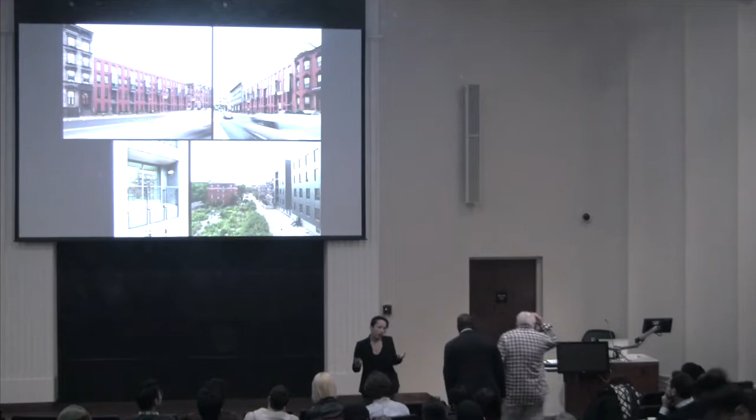As Milton said, I titled the lecture Negotiating Identity, and I'm hoping that I can present a very humble and honest path in understanding the work after 16 years in practice.

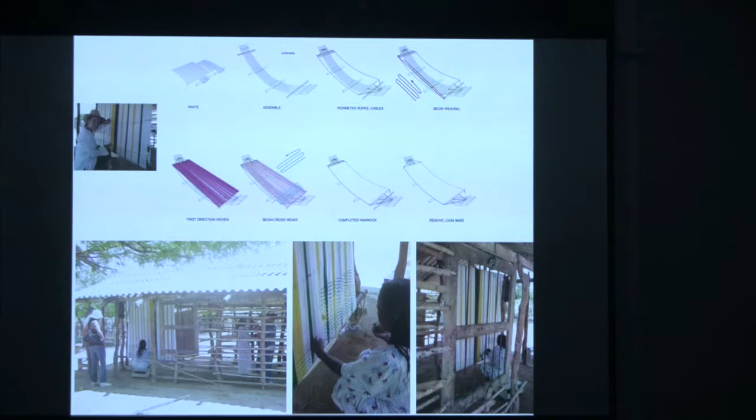I was really struck by how the indigenous Wayuu would actually have their housing structures, their posts and beams, as part of the structural framework for the loom of the fabric. This provided me a structural idea and system to create the loom out of this 40-foot long structure, made of pretty much 2,600 linear feet of rope, which is almost 5.5 times the length of the Boston Hancock Building.

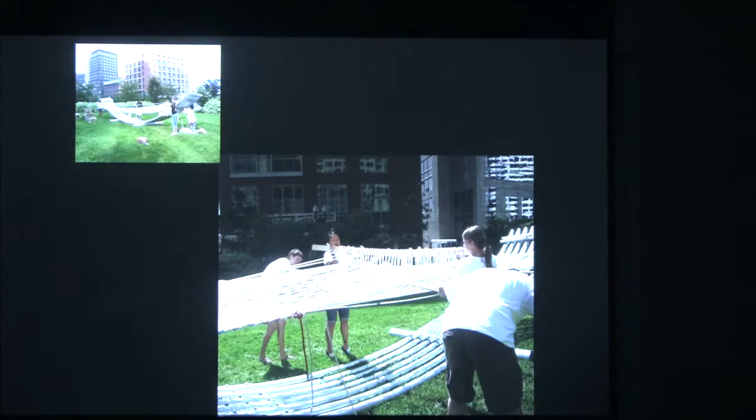The idea of creating the structural loom, and then creating the warp, the main structural rope. We needed to create a very long needle to weave the fabric together. The idea was to put this in the Greenway, where a lot of neighborhoods abutted the area, including Chinatown, the financial district, and the Seaport district, all along this mile-long Greenway. What we created were performances, and it took four days to actually weave this whole structure.

It was a performance piece. We wanted to make sure that people in the financial district would look at the labor involved in the product, and we would provide brochures to let people know where hammocks came from. So there was a conscious decision to know where things came from.

We had the Big Hammock Song performance on the space, and we also produced a book in three different languages because we were right next to Chinatown. We produced English, Spanish, and Mandarin editions to have readings for children coming to this public space. Again, we wanted to find a way in which people who didn't necessarily know each other could just start talking to one another to spark conversations.

In terms of culture and identity, that was something particular that I would say my identity mattered, and I wanted to share that. When you're working in your own practice, you have other cultures and other interests.

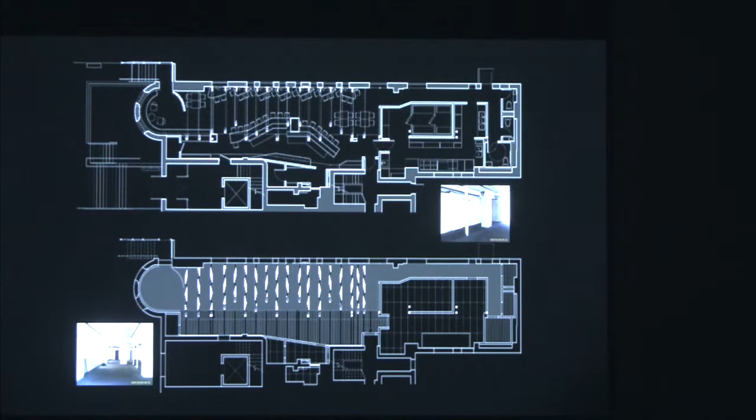So what we did is we incorporated LED lighting through a slot, so as you were going through the space, you felt a sense of movement through those projected lines.

In terms of gathering, I was very fascinated by visiting Brazil and how people eat there. Usually with furniture, one sits right next to each other instead of in front of each other. So we found a way in which these structural ribs would support the tabletops to allow one to be closer to one another.

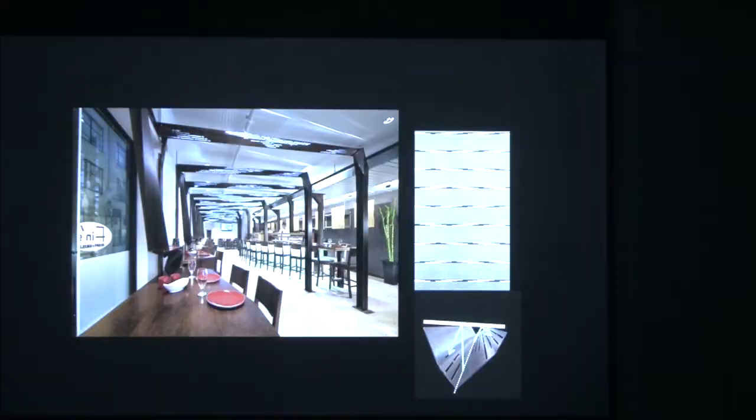In terms of the joint, as Milton mentioned in the introduction, we did grow up in the digital world. We knew we were very facile with CAD/CAM technologies. It was a really good way for us to work directly with materials when you're first growing your practice.

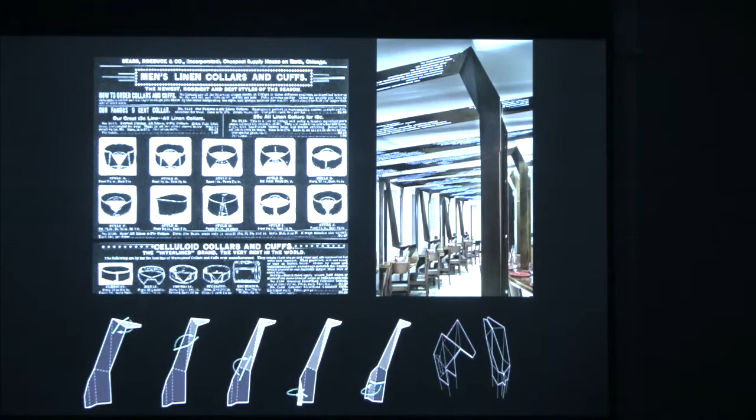We designed these joints taking influence from origami, and we developed what I would say are flexible joints. The idea of flexible joints for us is we wanted to create a frame that was both post and beam. We called this an architecture of joints, and we were really fascinated by men's collars and these joints. Can you find a way to remove the categorization of structural systems by creating flexible joints? That's how we created continuous rigid frames.

The idea here is that the frames, which incorporate the lighting, also extended like a waiter. When a waiter comes and provides you with a menu or a wine bottle, it also provided a shelf for the soy sauce, the containers, and the menus for the space.

In terms of another motivator for the practice, similar to you, as an undergraduate student when I was at Cornell, I found the motivation—like how does one begin to produce work that has conversations about the things you felt were unjust in your educational system.

Motivation for me, in terms of being determined to have live conversations about something I found annoying, was basically an insult: during school I had professors constantly showing me Carlo Mollino's work, the futuristic architect who practiced in the mid-20th century. The objectification of women I found highly disturbing, and how the body was contextualized in the actual plan—that you literally take a torso.

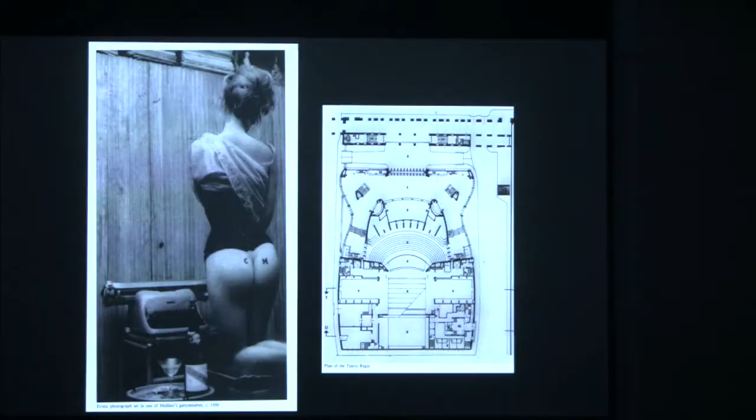I felt that the woman's body was a colonized figure—literally you would take the shape of the woman and put it on the table. And I felt like for you to take the profile and put it on a table for you to eat from, I felt was perverse in some ways, that you can touch her, you can control her body.

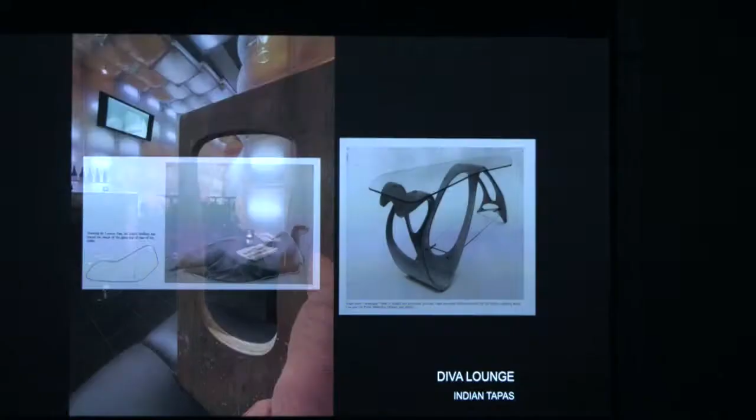And so when we were asked to do an Indian restaurant, Diva Lounge in Somerville—all of the projects are basically in the Boston and Cambridge area.

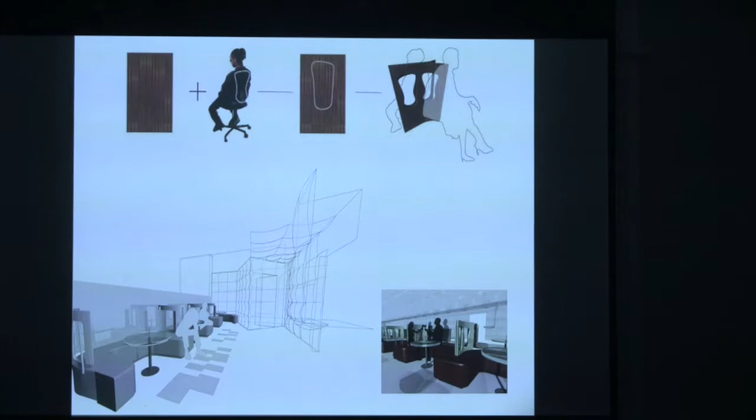I thought this was a great opportunity to look at the silhouette, the contour figure of both male and female. So we began to take the profiles and remove the material, similar to how the artist Gordon Matta-Clark would use the cut to remove the distance between object and subject, or the house interior. By showing the interior, you're exposing and removing any kind of imagination—it is what it is. That's what we're also doing by removing the surface where two strangers might be next to each other, providing a surface of flirtatious connection or touch. We were trying to let that be a moment, an encounter of togetherness versus the separation of different bodies.

The Diva Lounge pods were completely enclosed with prefab replacement domes, the kind you see in skylights. At the time we did Diva Lounge in Somerville, it was a very avant-garde project.

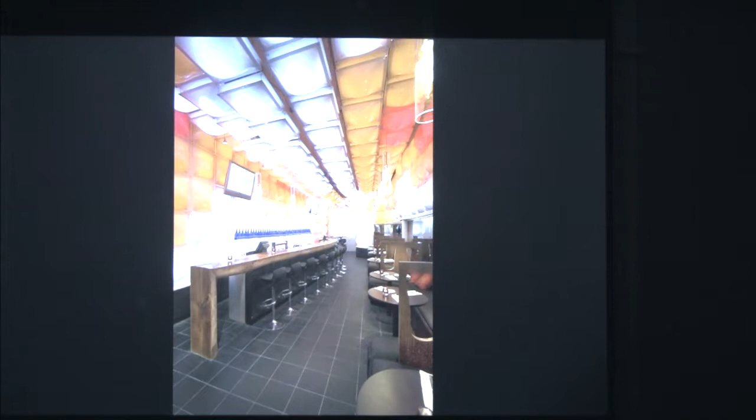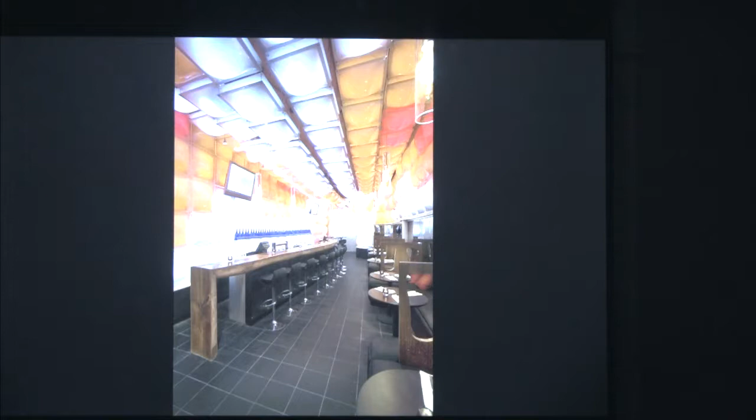In interiors for restaurants, you can only have about 10% be of a different surface or fabric material—you couldn't clad the whole interior without sprinkler systems for different materials. So what we did is say, well, it's a lighting atmosphere, not really a decorative surface. It's called decorative surface, and you can't have more than 10% be decorative surface. So the way we got through fire codes was to basically say this is lighting cladding—a lighting interior is not a surface at all, it's lighting. We were able to convince the fire department this was okay within their codes.

The door had two eyes, and it was a way of showing the reflection—you don't really see what you see. You think you might know something, but you don't. So this idea of the inversion of the two mirrors as you approach is a way to make people stop and think before entering into a project, into a space.

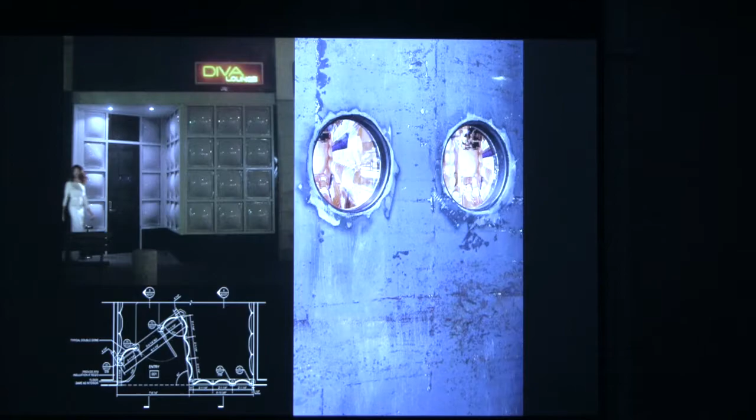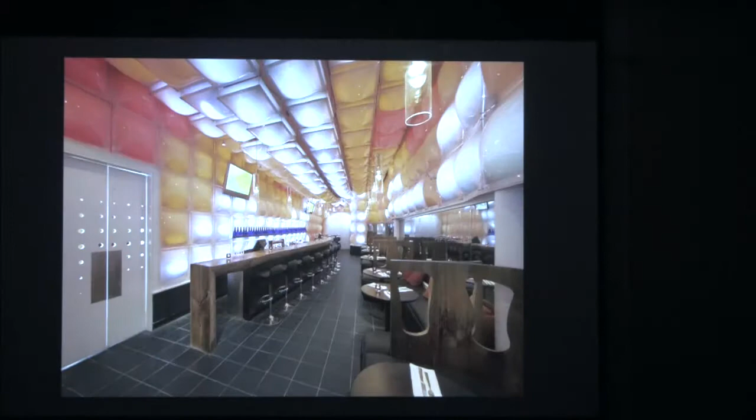We created a lighting scheme based on where we thought social condensers might actually occur along the bar, and that became the lighting plan.

I was always very influenced by Eva Hesse, and I really loved these art pieces she would do. I found that women and men share the same thing—I was looking at nipples and how they're shared by both genders. So I wanted to create a nipple table, because I wanted people to fawn over the table while they waited for their food. Here's another idea: whenever we have a chance to make people stop and think about our differences or similarities and have fun while doing it, we do that with our projects.

One request from our clients was for a bar—so what happens at a bar really late at night? People have accidents, they vomit. They asked us to think of a texture where you don't see the vomit late at night when everyone is drunk, and literally we had to respond to that. What we did is use a rubber slip mat foam as formwork to play with plaster.

So this is the long beer hall.

We needed to create an identity from the entrance for this industrial building owned by the city. There was a retail component where you would sell Harpoon's clothing products, and then you would enter the beer hall before going into the tasting room.

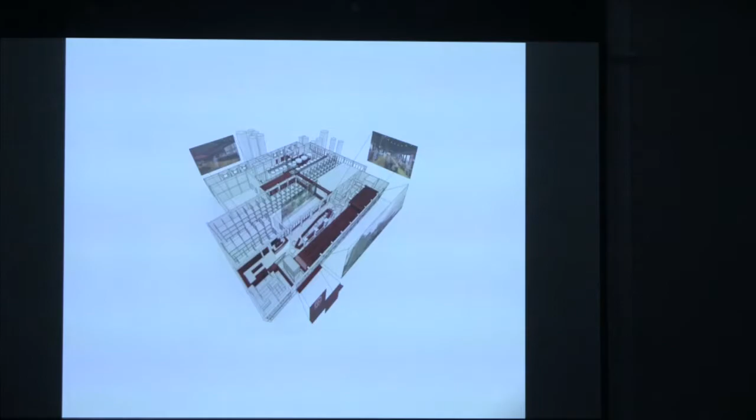There needed to be a connection to see the microbrewing process from the beer hall. You can see that was part of the industrial building, which is right near the seaport.

I always look online to see if our project is successful, and this made me really happy: props to the brewery for the view of Boston from the urinals at the beer hall. You probably think I'm obsessed with the bathroom—I am. So here's the bathroom with the urinals overlooking the sky, and you're going to see the view in a second.

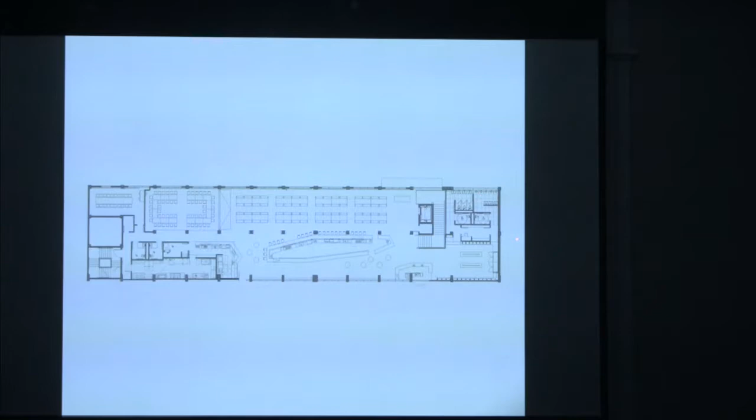I was here with the owners, all men, and typically presentations are made to men as a majority. They were so excited to have that skyline view. And I made sure the women could also have that view—this is why representation matters and why women need to be at the table. I did it through their sinks, because you still need privacy. So here's the view they were really striving for.

So representation matters, and I'm obsessed with gender only because of my experience developing a practice from nothing to something. What are the struggles along the way?

Out of 41 or 42 Pritzker Prize winners, they're still almost all men. We only have one Zaha Hadid, and two who won with partners. I was very happy to see Balkrishna Doshi win, because he actually wrote in my book and was wonderful to work with—he wrote about the Indian project he did.

In terms of the Pritzker Prize, as Milton said, when I find something that doesn't seem right, I try to use academia to investigate why systems haven't changed. Mainstream architecture history and criticism does not incorporate discussions of class, race, religion, gender, or sexuality in reference to the producers of architecture. Ignoring these differences enables presentations of a homogeneous history.

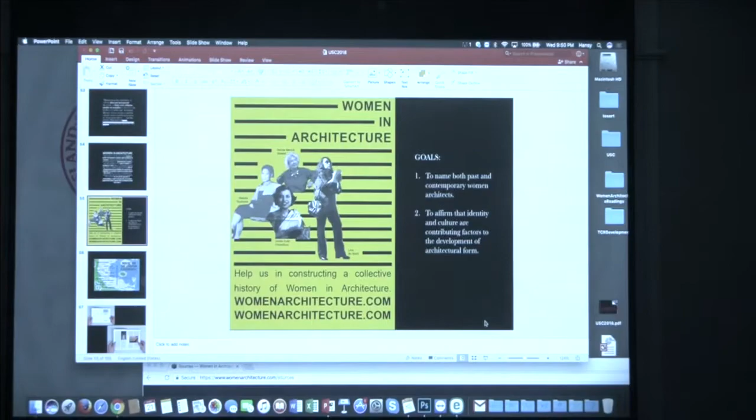As Milton mentioned, we're the utopian visionaries, architecture of social exchange. When I put together the edited book with different contributors, my interest was to say we understand we're a global practice, but it's not necessarily a single narrative anymore—it's a collective narrative of different places. So how can a book be put together to portray the various narratives one has in experiencing projects, social projects?

In the book, I interviewed Simon Velez, a Colombian architect who works with bamboo, and I learned 3 things from him—advice that I would give to you, that I've taken to heart. One is: give your work for free to the city. It allows for experimentation.

The second was: do not work with prefabricated materials. It robs people of work, and it doesn't really embrace the idea of craft or advanced craft in general. And then the third thing was import-export laborers.

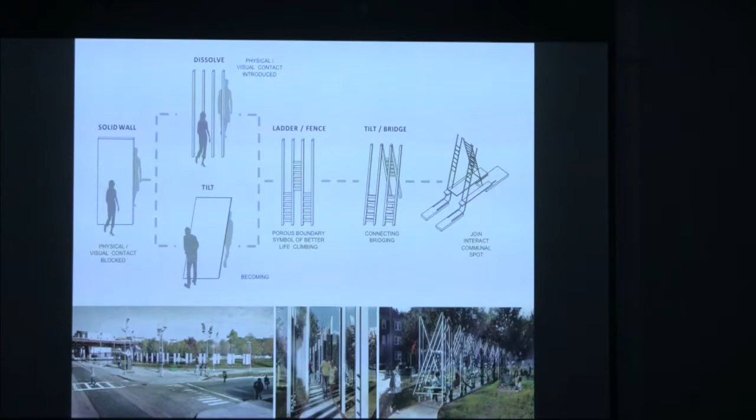And so the idea was to create really a social space. And so we use Rexlace, which is what you make friendship bracelets out of, and we use our garage a lot to fabricate these installations. This one was a little bit more complicated in terms of programming.

So what we found interesting is to bring people there, we offered free ice cream. You get a lot of people coming to the public area. But it was a hook to start talking about the great contributions immigrants provide to the city of Boston.

And we had literally Boston Public Library come and do readings. We had live puppeteers. We worked with the Mayor's Office of Immigrant Advancement, and we had sessions to show them legal services that were available to them.

And then we also made another book, but this time we were dealing with the Vietnamese immigrant population. And we did a book called The Ladder Falls and Forms a Bridge, in Vietnamese and in Spanish. And it talks about...

A poem: I can't speak English. True, your parents' accent - proud you should be, and keep your head up. I don't like my fingers, Mom. Dear, you have stout hands that help with the chores and learn new knowledge - proud you should be, keep your head up. I don't like my eyes, Mom. Dear, you have a vision broad and far that has seen this land and your ancestors' homeland - proud you should be. And then at the end it says: I like myself, Mom. I like my accent, I like my fingers, I like my eyes, I like my figure, and above all, I like you very, very much. Proud I would be, keep my head up.

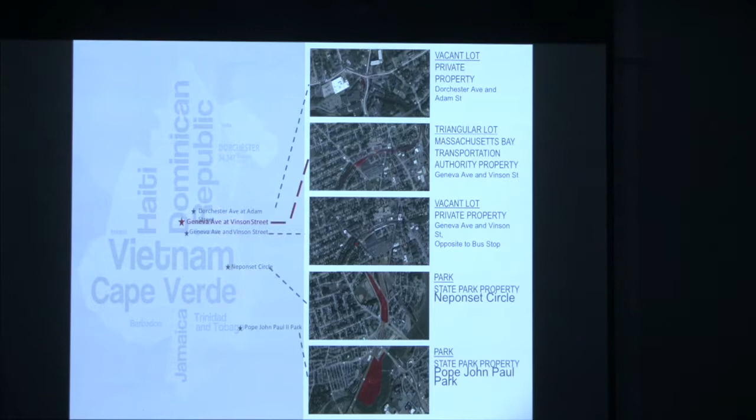What we learned from this project, because I take on all the liability myself, I take all the permits myself, is that Dorchester doesn't have—first of all, where you need public art most is not in the places where you see them. It's usually where all the visitors and tourists go.

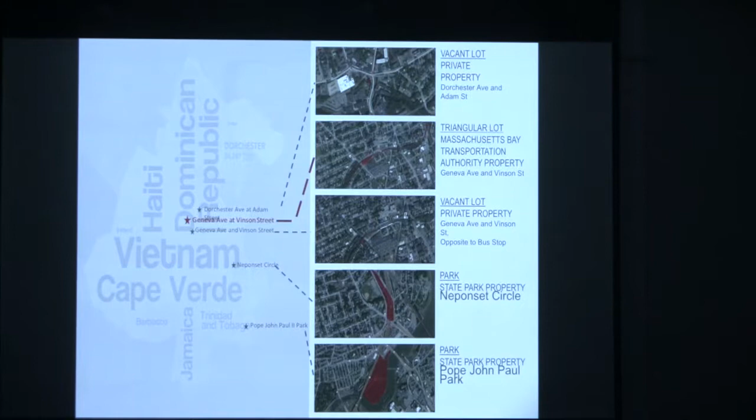What we realized in Dorchester is that a lot of these vacant lands are owned by the state—the land we picked was owned by the Massachusetts Bay Transportation Authority. A lot of public land is owned by the state because it's adjacent to train stations, and there's no communication between the state and the local city. So a lot of these lands just aren't cared for. That's what I found interesting in these areas.

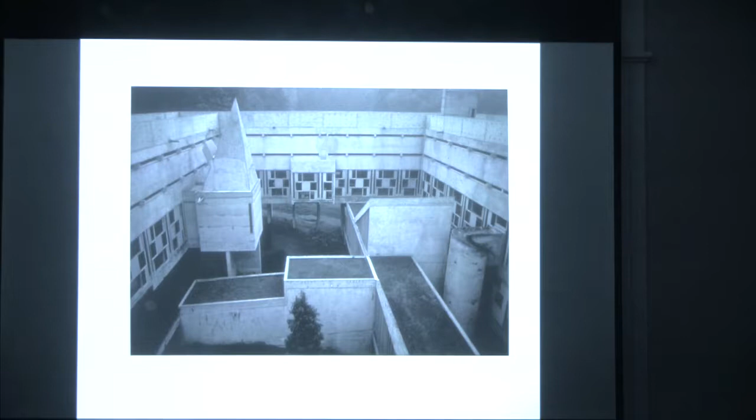The Modulor man, right? The blue Modulor figure—how tall? Really tall, like six foot, like the blue versions with your hand up. So if you're drawing architecture using the Modulor man, a very tall human figure, you see these strips here? I had to jump up and down just to experience what my colleagues were experiencing. This is the moment I felt exclusion in architecture.

It exists, and how do you set up that process so you could be inclusive? So this next project—we were asked to do the Multicultural Center, a space for students of Asian descent, students of Latin descent, and LGBTQ students of color.

What was fascinating about it is that this space came from a series of protests. When I was going to school in the 90s at Cornell, there were protests from students. So change actually occurs from student protests.

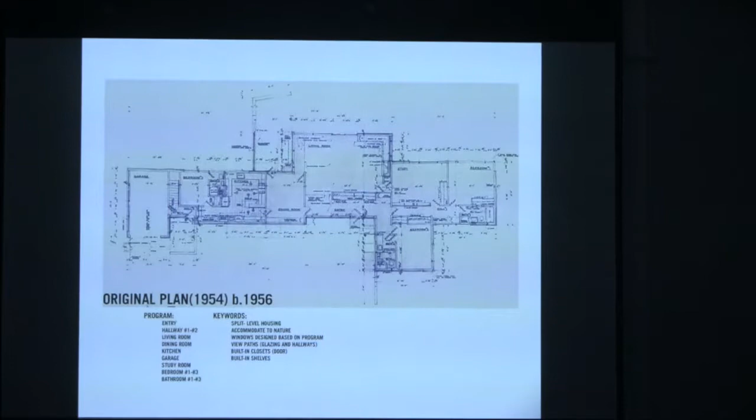The original plan was from 1954. It was used as a residence for a dean of students, designed by Walter Pierce. You can begin to see that they were considering it a historic structure. What I found interesting is that Walter had a collaborator, his partner Marion Fisker, who was also a designer and artist.

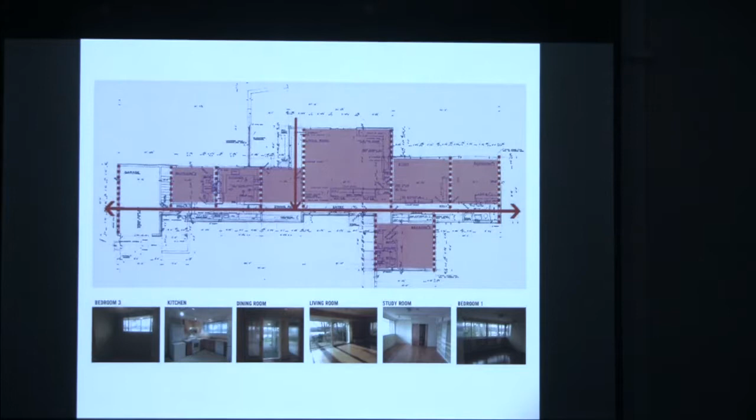It was another kind of conversation I felt I was having in contemporary terms: how do I bring back the idea of printmaking, since she was also a printmaker, into this kind of design process?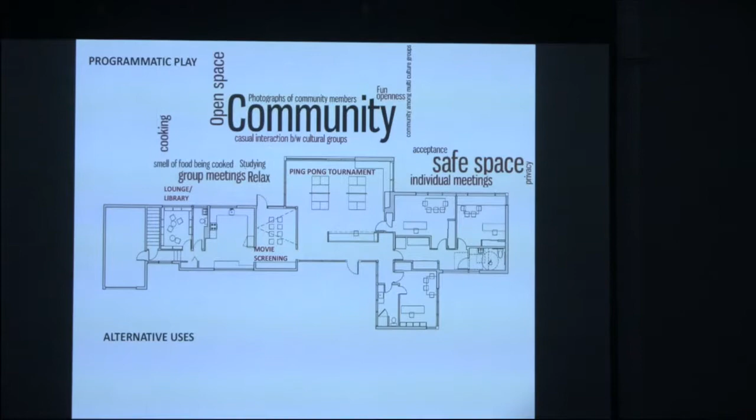We looked at tapestry and how to weave different types of identities together, because I had to deal with different groups. What's happening now in institutions is that I met with another institution, and the interesting dilemma now is how many micro identities do you begin to design for. This idea of negotiating identity, the hierarchy within that, is now a very good question.

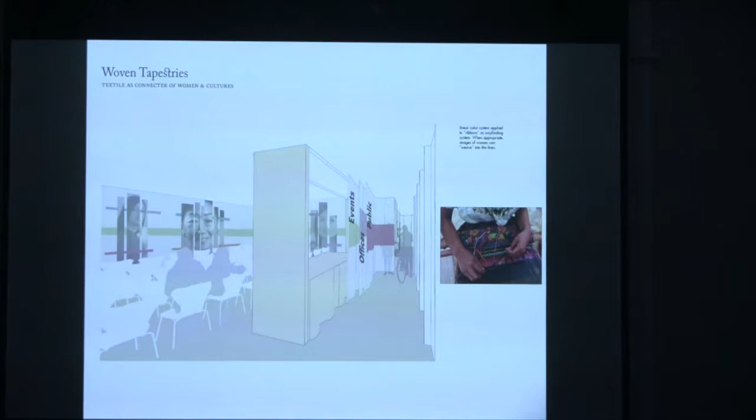Textile as connector of women and cultures. So what do these different social or culture groups have in common? We looked at branding and graphics, and in terms of textile, the tradition of Lao weaving in Asian culture, how do we use that to brand where their advisor office might be, or the Japanese method of dyeing fabric, or Mexican embroidery, to speak to that heritage.

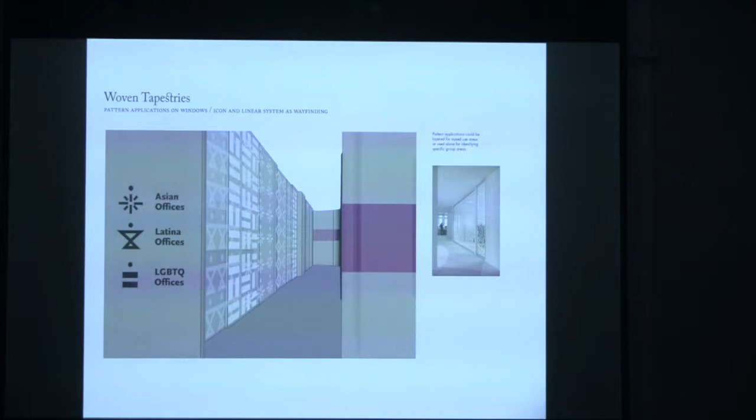And then the LGBTQ equality. What tended to happen is that the groups did not want to be identified that way, but it was a beginning departure point to make something that felt like theirs. If anything, they actually wanted just blank wall space so they could contribute to the design of that space.

Here you begin to see we had to work within an existing historic structure, and we made it very flexible, so the entrance reception can close or open up to allow for much more intimate social gatherings. This is where some of their contributions to the space came in. We cleaned up, opened it up, and worked with the historic elements while bringing it up to code. It was a very small project, but I felt it was very important because it was the type of project I felt very comfortable doing.

And then lastly, in terms of housing, we started with commercial restaurants, then went into art installations, and now we're working on larger projects dealing with issues of identity. I think identity at a larger scale, or negotiating identity, really deals with context and almost typology.

Boston is a very historic area, so what you see here is how living changes, or the way of living, depending on context. If you're in the suburbs, your way of living is going to reference that. In an urban context, whether you're living in a row house, an apartment flat, or in between buildings, it's very much a resultant of that neighborhood.

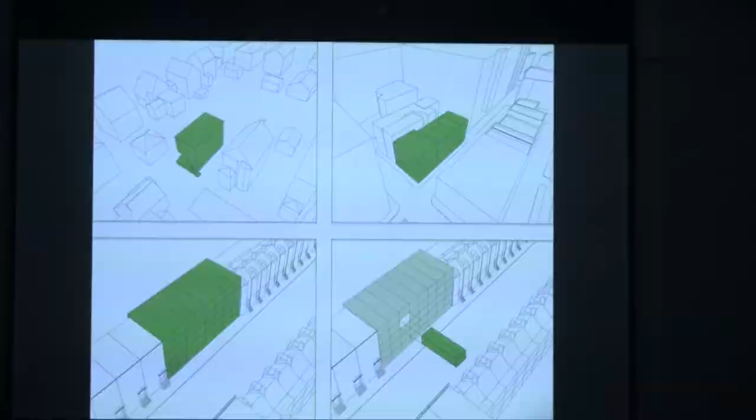Going back to World War II, women could now be outside of the home. They could do many more different jobs, but they also had to work within the role of being a mother.

What I found fascinating was looking at the case study house in Arts and Architecture by Entenza - you're all very familiar with the case study house. What I found interesting in looking at housing was how the kitchen and these social spaces have evolved, and what I think is wild is the positioning you see in the early case study houses.

During World War II, women were liberated and could do more things, but then experimental housing and media began to box women in again to traditional, supposedly conventional roles, and I think that was really damaging. You can see in the case study house that the man and wife leave together in the morning, dressing activities are provided by two separate dressing areas, and the kitchen is adjacent to the dressing bedroom wing - by this arrangement...

One can easily attend to the preparation of breakfast and quick meals while dressing or working at the bedroom desk. So you can begin to see here, here's a master bedroom, here's a men's wardrobe, and here's a women's wardrobe right next to the kitchen. So she can get ready and go right next to the kitchen.

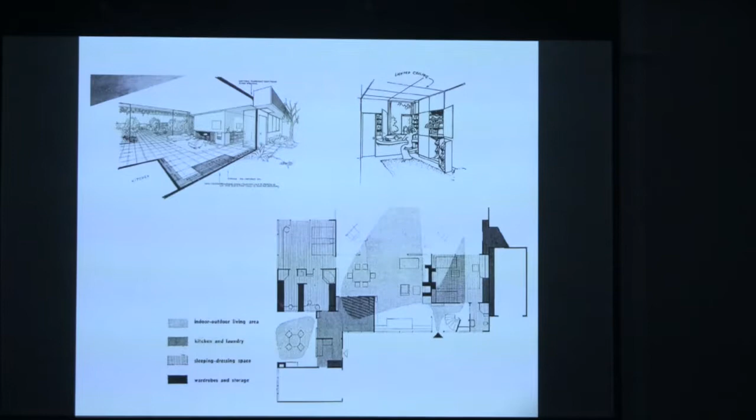I'm not sure if you guys discussed this in the case studies house, but I found we go from the adjacencies of these rooms to now looking at the kitchen as a surface for conversation, where the woman has to both host and prepare meals at the same time and have a conversation.

And so we begin to see the kitchen and the flexibility of the kitchen beginning to open up into the living space. So now you see food preparation as the heart of the living room, part of the larger social space. It's no longer a categorization of its own.

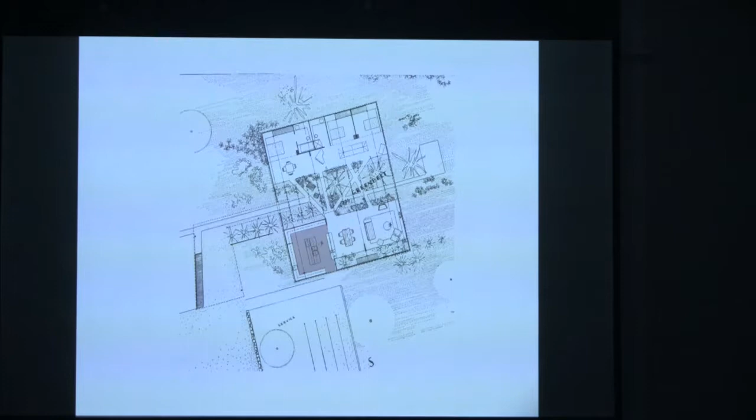You can see Case Study House 4. Here you can begin to see that in these quadrants it takes up the same amount of program space, so now it is part of the larger social space as a heart.

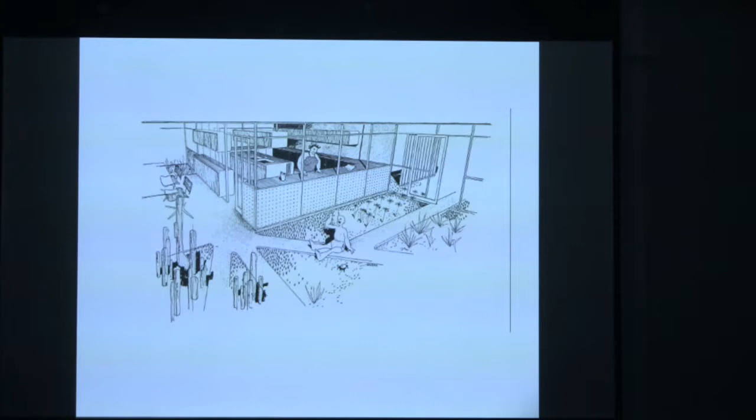In terms of the kitchen type, I think that's where we are today. You either see it as utilitarian - in an urban context where it needs to be small, compact - or as a larger social space. In this housing project, the kitchen is part of that large social gathering space.

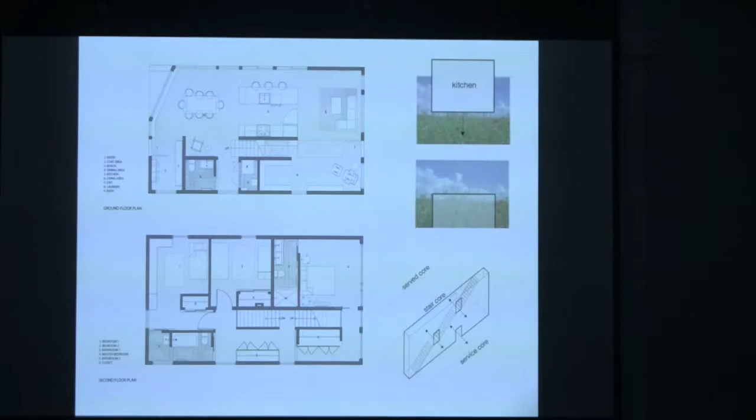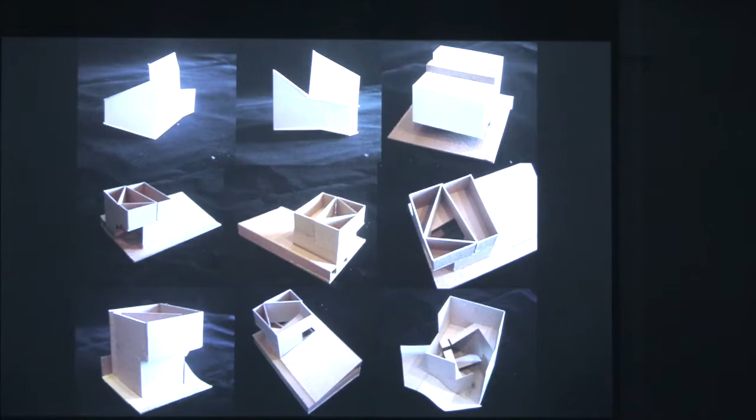So this is the design process in our office. This is a house for my partner and I. We couldn't agree on the house, and we did all these plans, and it literally took us like 2 years to come to a negotiation about what the house should be like because we couldn't agree. There's my son and my daughter, and basically this is in Boston, in Roslindale.

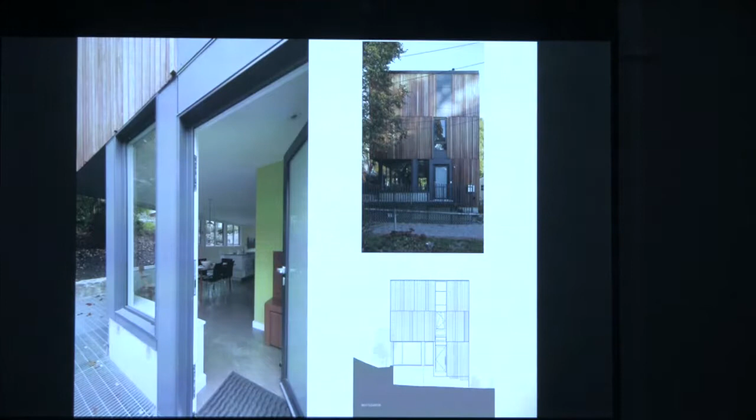So what we did here is basically create this vertical shaft space that pulled all the heat up to the top. It's all electrical - we used heat pumps. This is where they play. This is a balcony where you always see them. The play and centralization, the social, is always kind of the center of the house.

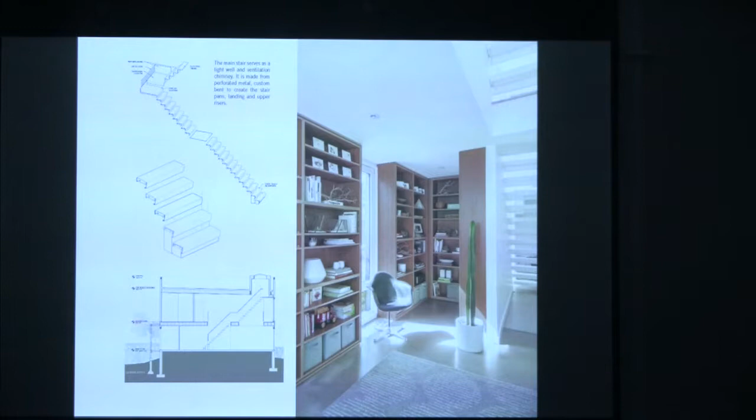This is the house before value engineering, when it was 3 stories. The only thing that was not incorporated was the super-insulated wall system - it was twice the amount. So we just used really great German insulated windows, and did all-electric heat pumps and a tankless water heater.

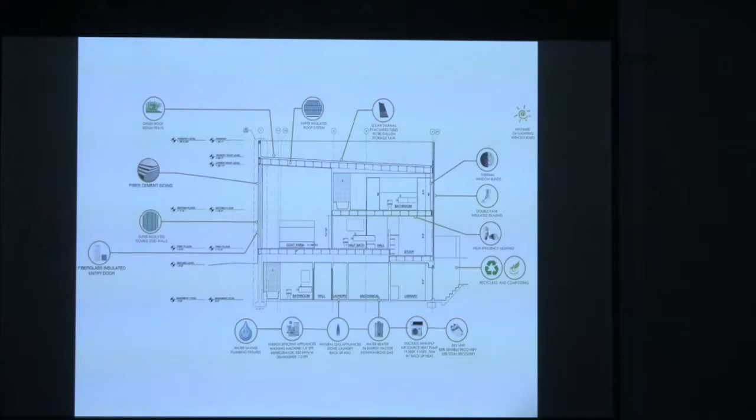And then this is the back. So it's very compact - we basically used the view of our neighbor. The back has a bit more glazing, whereas the side, where you see the neighborhood, is mostly closed in.

In terms of the South End, this is a building - 45,000 square feet - where we had to incorporate 40 residential units and 30 parking spaces. The tricky thing about this was that it's a historic district of South End, and we had to negotiate the Victorian row house with the neo-Renaissance building.

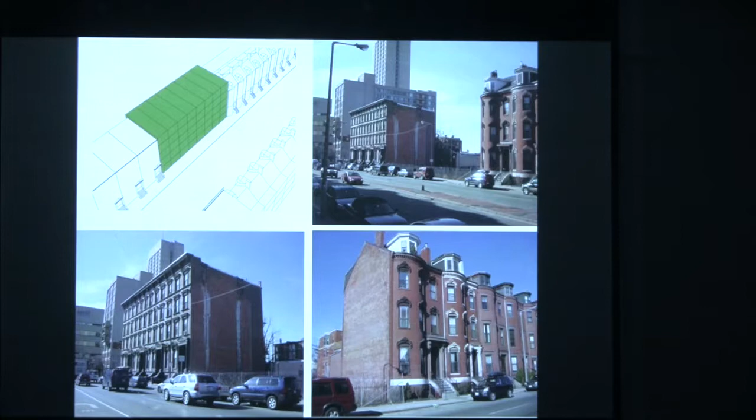There had been like 3 developers, and they couldn't get it passed through the city. So the developer came to us and asked us to help them with the project. During a lot of the community meetings, this is what happened - people wanted oriels, and we were like, what are oriels? So we found out that oriels were simply just a projection that you would see.

And it brought me back to the theories from various architects that I had studied, like the way that Lina Bo Bardi uses the window to create ventilation, light and air to pass through.

I thought of Auguste Perret, the French architect who used the window anthropomorphically for the whole human body. The idea was that you were inside the frame, within the city, overlooking the city. I looked at Le Corbusier's cinematic kind of window that doesn't break the view, and Eileen Gray's use of the window for flexibility. I found it really fascinating that just through your idea about a window, you basically talked about the identity of the architect, how one practiced.

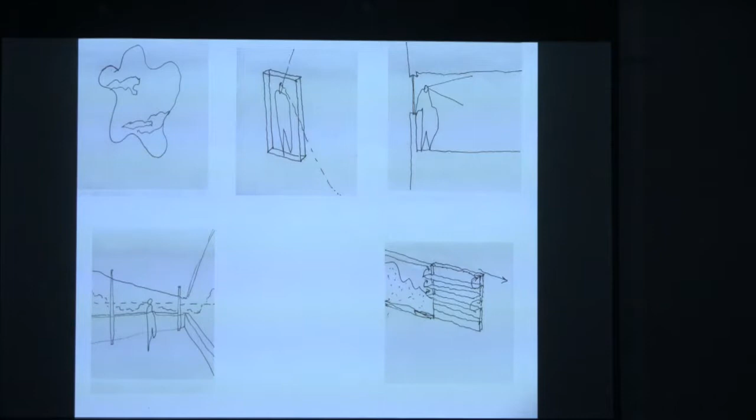We went with Auguste Perret's usage of the urban window. So this is what, out of many iterations, we did: a 6-story structure. You actually don't see the penthouses in the back here. And we had the projected Oriel window that basically participated as part of the urban environment.

We used a terracotta system, and we went very detailed at the base to have a human scale, and then created different treatments. Boston's obsessed with the cornice, so this cornice really looks at the sky. And we had to produce these historic line drawings to convince the city how it was contextual, how it carried on the bow front rhythm, and how it carried on the base, middle, and top of the building.

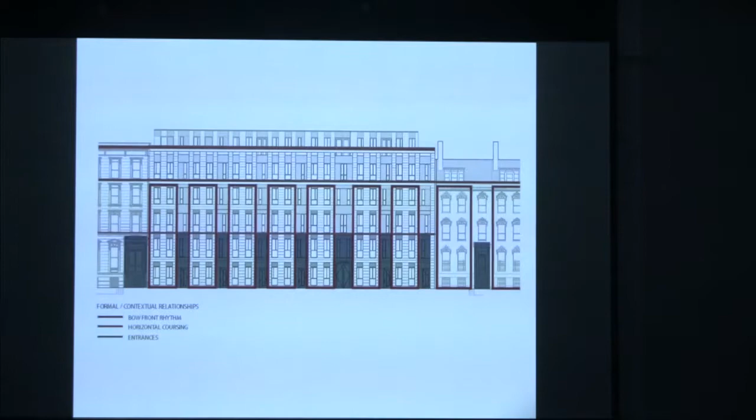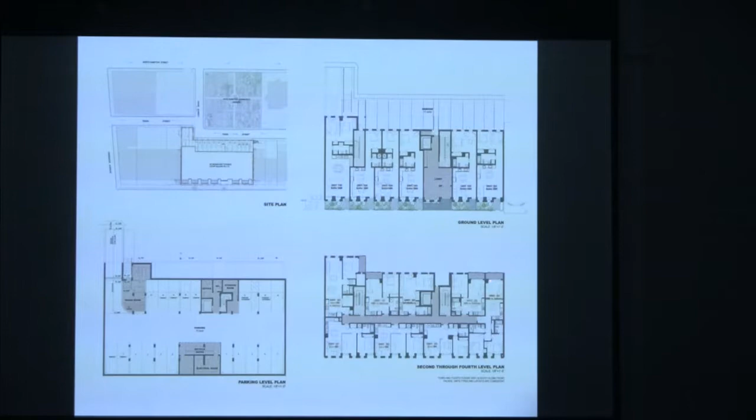So we consider ourselves modern architects, but when you're working in Boston, where most of the neighborhood is historic, we find that if you're a good architect, you can make it work with different identities, different typologies. The units are pretty much front to back, with a diversity of 2 to 3 bedroom units, and then the penthouse, which is 2 units in itself. The back looks onto a Roxbury community garden, so it's on the border of South End and Roxbury.

The next site is Bay Village, Piedmont Park Square, where the lot is about 20,000 square feet with 8 residential units and 10 parking spots. Bay Village is bounded by the Back Bay, South End, and the Theater District. This lot was plagued by a huge fire - 400 people basically died. It was called the Cocoanut Grove, and it sparked a whole bunch of code changes.

No one wanted to touch that site. It was turned into a parking lot. People were afraid to build anything on a sacred site where 400 people died in the 1940s. So the developer - we did all the drawings, from schematic to construction documents. Here's the site right here.

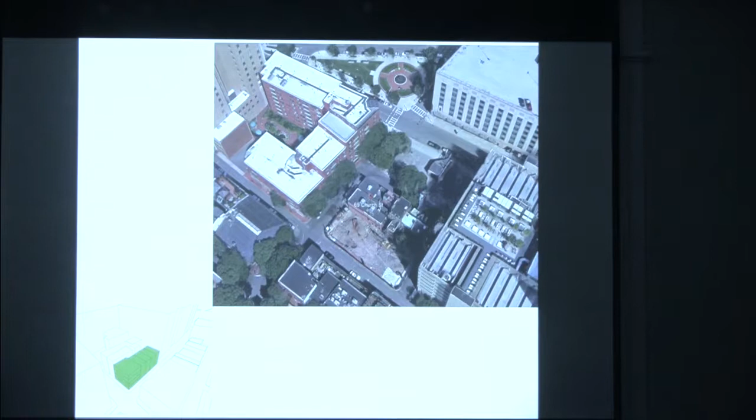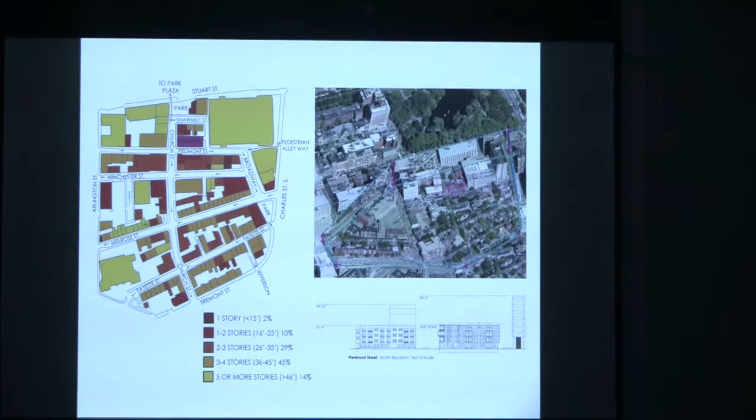The majority of it is a historic district, mostly 3 to 4 stories. Then this area is not historic, and you start getting into much higher, 5 or more stories. We had to show how this project was going to reference the historic typology - the townhouse typology. Only the corner could be expressive, based on the historic landmark guidelines. Only the corner - this is crazy, right?

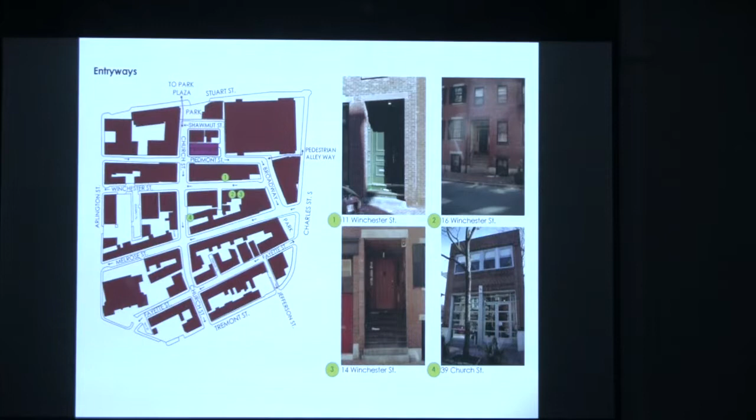Like systems, and you have to work within these systems, so only the corners can be expressed. Then you have the Oriels and projections come back, and then the main entry. Our strategy was to create 4 townhouses and 4 apartment flats to create 8 units total, with the Oriels coming back, and the corner being the only place that could be expressive.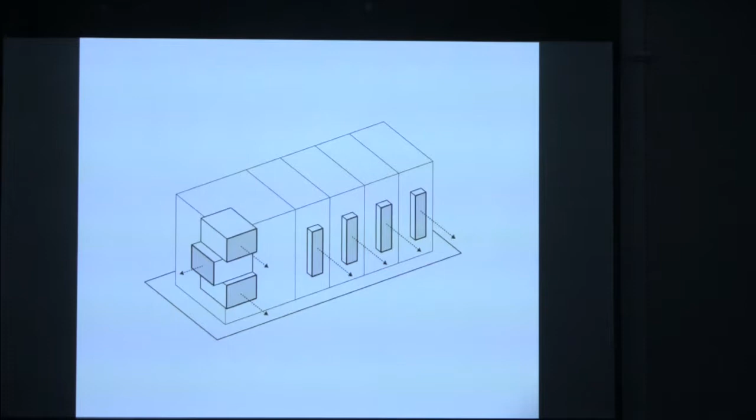So we tried to push the envelope a little bit with this one. And this is what we built - well, not us directly, but the contractor. You can begin to see that the row houses, even though it's a large single block, we created two different distinctions between brick and color. The corners are these kind of dovetail corner conditions, you can begin to see here.

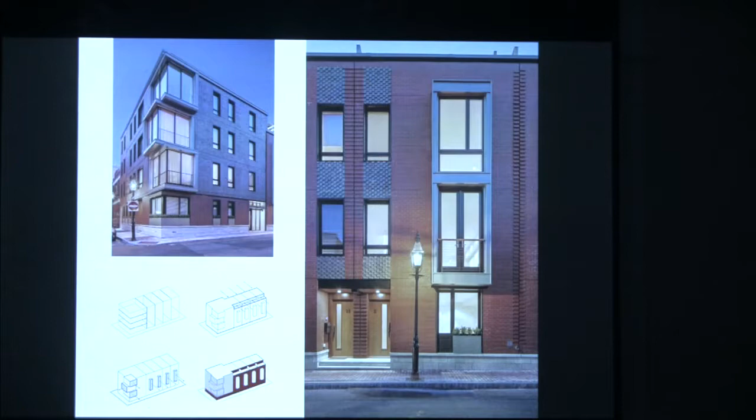These are more like the living spaces, and we tried to express the difference between them through different types of brick patterns - stack bonds, running bonds. We call this the zipper material. This is the lobby - I'm going kind of fast now. And then going up to the roof.

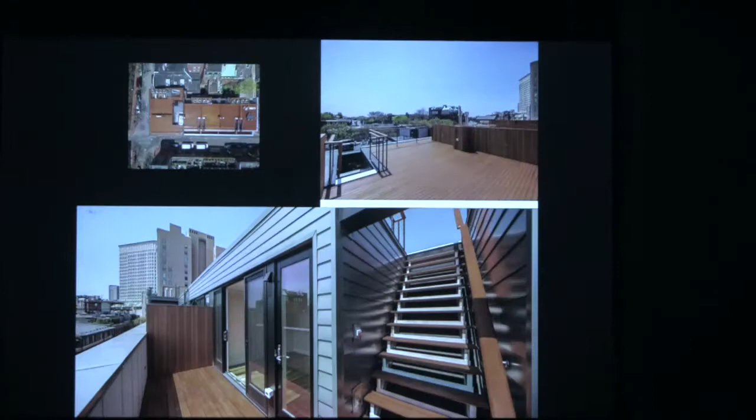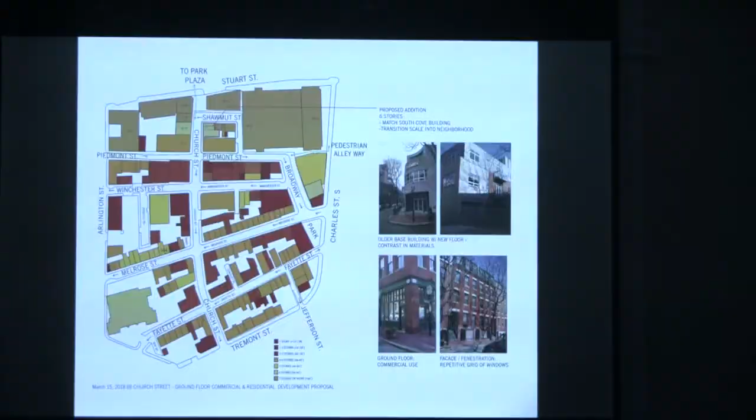This developer also bought this neighboring property. So what happens when you're doing a project, other neighbors start saying, I'll let you do this project if you buy my own property, or you have to negotiate. So we're now in the process of doing this project right next to it, which you see here. These two structures - we're now proposing about a 10,000 square foot residential addition to the two-story structures, where the first floor is commercial. All of these are residential, but this one is commercial, and the top will be residential.

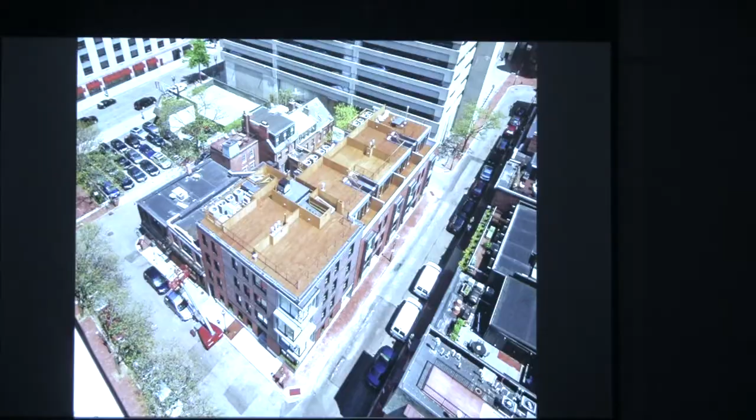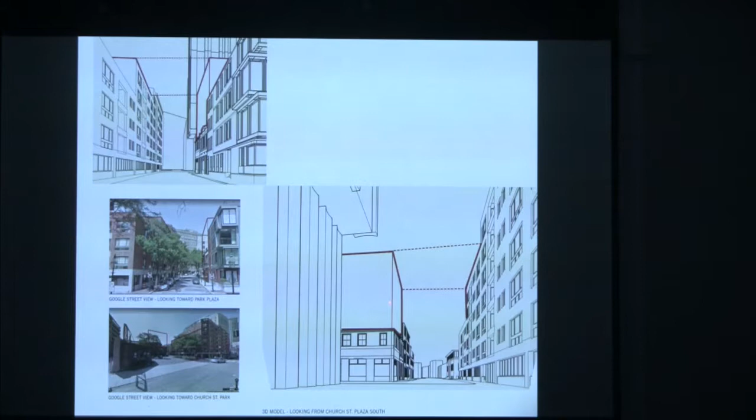And literally, this is hot off the press. This was our March 15th historic presentation, where we're trying to convince the historic commissioner that they should give us 6 stories, but that area is mostly 4 stories.

So we're showing them renderings of how this should match. Oh, look, we have a corner condition. You see this base? We noted that this base was odd with the neighborhood, and so we thought this was not of its original use. And so we had to, I was able to find

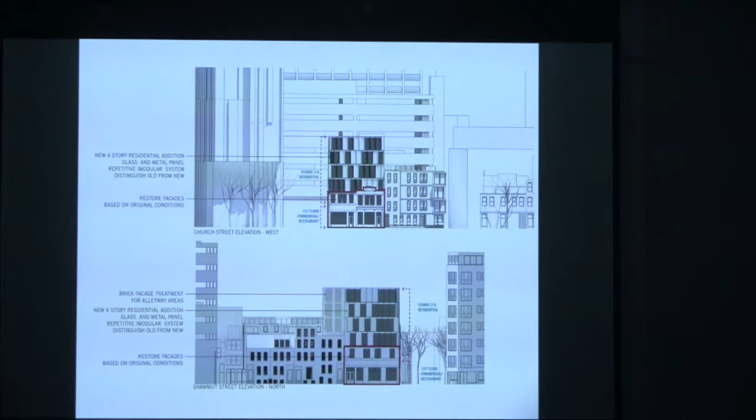We're gonna bring it back to historic, but let us be a little bit more loose at the top, a little bit more. We're kind of pushing them a little bit. And so the idea here is, forget the categorization of the punctured window with the masonry construction. Let's just say the window is the surface.

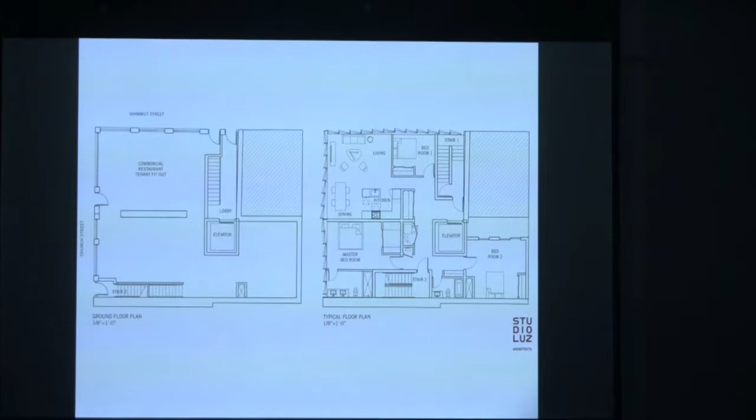And basically in these developer projects, we're always just giving them this utilitarian kitchen. So that's our latest one. So we're in this beginning phase.

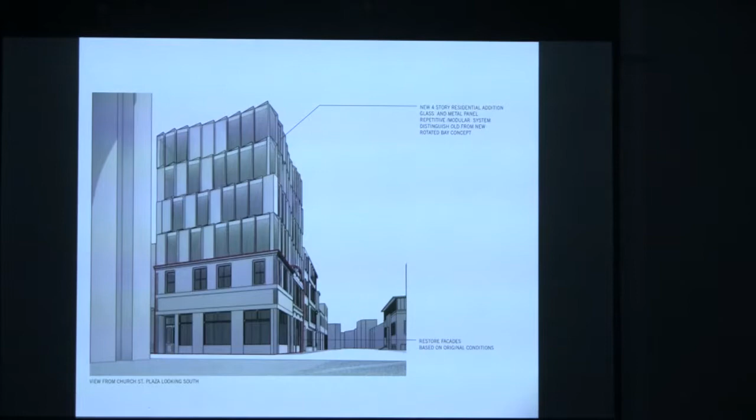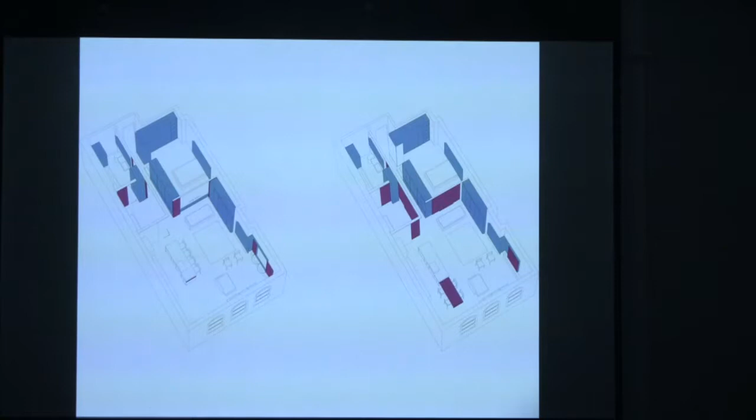And then lastly, what does a unit look like when it's one of those 40 units? This is when you're constricted with, let's say, a 1,200 square foot space. How do you deal with flexibility?

This is where we then use surfaces to begin to distinguish rooms. So this is entering into the master bedroom. And here is like a little office, but it can be closed to create different kinds of functions for the owners.

And then when you have a party, it can expand. So basically,

In conclusion, how you live is really dependent on context, and specifically in Boston, how do you begin to negotiate the types that are around it to make an argument for your work? And that's it.

I think that was an hour. Try to be fast, huh? Oh, questions, please. Yes. You did, great.